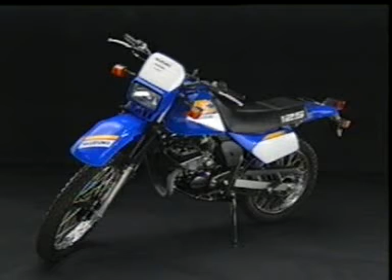The main component of a motorcycle is its engine. The first section of this video presentation will deal with engine types and their composition.

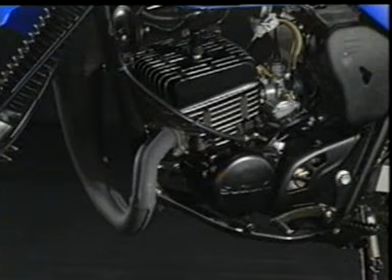But before discussing the actual makeup of each type of engine, let's go over the basic principle of operation of the internal combustion engine.

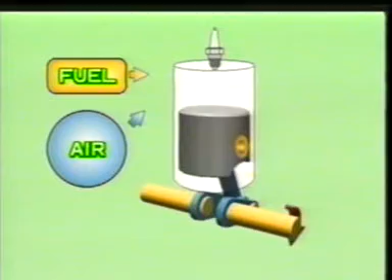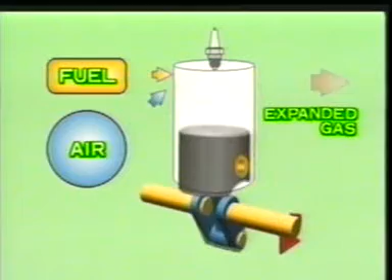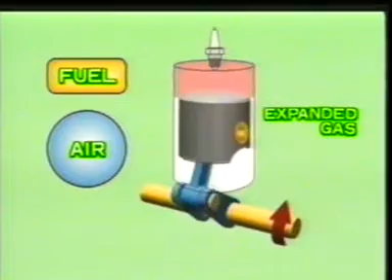A mixture of fuel and air is injected into the chamber of the cylinder above the piston and is compressed as the piston moves upwards. This makes the mixture very easy to burn. When it is ignited, it burns instantly and expands, increasing the pressure within the cylinder. The piston is then forced downward by the expanding gases created by the combustion. The force created by the downward motion of the piston is converted to a revolving movement by the crankshaft. The engine is thus a device which provides power from this revolving shaft.

As you can see, the engine operates in cycles. Each cycle is composed of the compression of the fuel-air mixture after intake, and the conversion of the force produced by gas expansion upon combustion. Each cycle is divided into 4 stages: intake, compression, expansion, and exhaust.

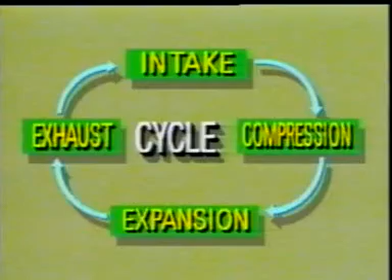Engines are designed in order to complete the different stages of each cycle without interruption. Many measures are taken so that the intake and exhaust will be executed smoothly.

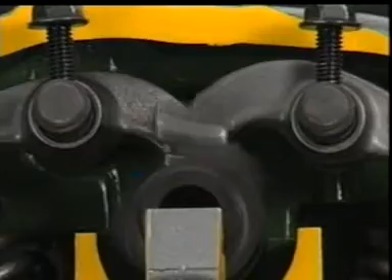The motorcycle engine can be designed in 2 different ways, both of which complete the same cycle. There is the 2-stroke method and the 4-stroke method. First, let's begin by looking at the 2-stroke engine, its composition and its systems.

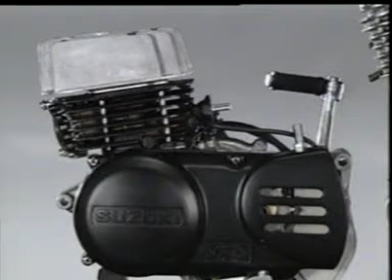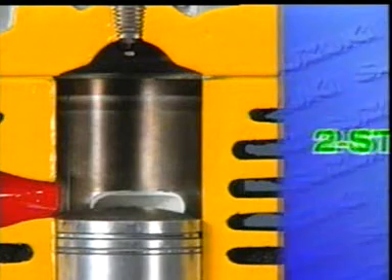During each cycle of piston movement, there is a time when the piston reaches its highest point in the cylinder. This is referred to as top dead center, or TDC. When it reaches its lowest position in the cylinder, it is said to be at bottom dead center, or BDC.

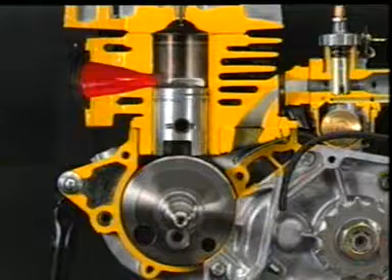The 2-stroke engine achieves 1 cycle with only 2 strokes of the piston. That is, there is only 1 revolution of the crankshaft.

As you can see here, there are holes in the cylinder and crankcase chamber of the 2-stroke engine. These holes are called ports and are designed to allow intake, scavenging, and exhaust.

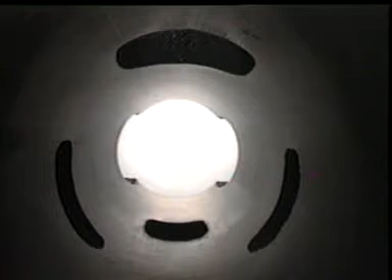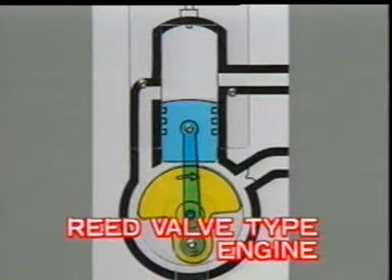Now, let's use this model of a reed valve engine in order to illustrate the basics of the completion of 1 cycle for the 2-stroke engine. In the 2-stroke engine, the upper chamber of the piston and the lower chamber of the crankcase perform 2 separate functions. Their differences are important.

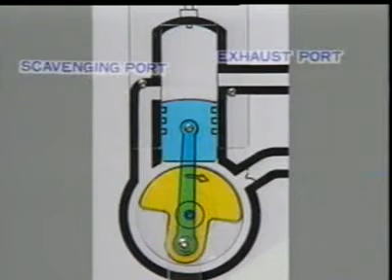First, as the piston passes BDC, it begins to rise. The scavenging and exhaust ports are closed in succession and the mixture in the cylinder is compressed. At the same time, because the vacuum in the crankcase chamber is increased as the piston rises, the reed valve opens in response, and the mixture is taken in to the crankcase chamber.

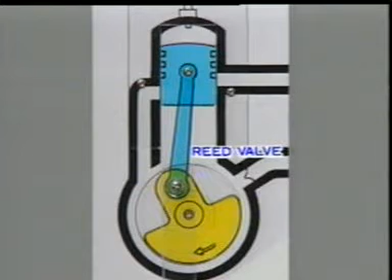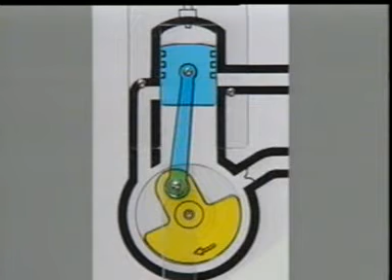The mixture that was compressed as the piston rose is ignited by the spark plug just before TDC and burns instantly, creating gases that expand. The expanding gases create pressure that push the piston down hard, creating the driving force of the engine.

As the piston descends, the vacuum in the crankcase chamber changes to pressure. The reed valve closes in response, and the crankcase chamber is sealed. As the piston falls further, the mixture in the crankcase chamber is compressed. This is referred to as primary compression and is a special characteristic of the 2-stroke engine.

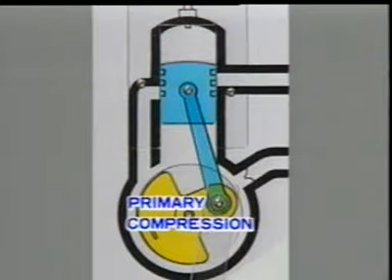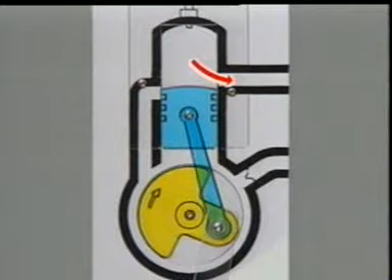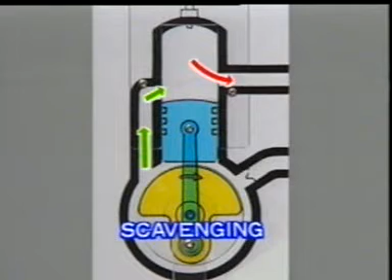As the piston descends further, the exhaust port is opened as the piston head passes it, and the exhaust gases from the combustion are let out of the chamber. A little later, the scavenging port opens and the compressed mixture from the crankcase chamber is injected into the cylinder, also pushing out the exhaust gases. This process of bringing the mixture from the crankcase chamber up to the cylinder chamber is referred to as scavenging.

In this way, the two-stroke engine completes one full cycle with 2 strokes of the piston, and power is obtained from every single revolution of the crankshaft.

Mixture from the primary compression in the crankcase chamber is injected into the cylinder through the scavenging port, pushing out the exhaust gases. In order to achieve this effect as efficiently as possible, the position and angle of the scavenging port must be determined with extreme precision, taking into consideration how the engine will be used.

The angles of revolution of the crankshaft, at which the intake, exhaust and scavenging ports are opened and closed, are expressed in the port timing diagram. Note the positions of intake, primary compression, scavenging, compression, combustion and exhaust.

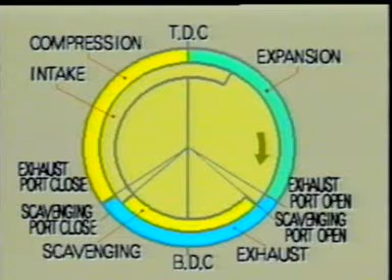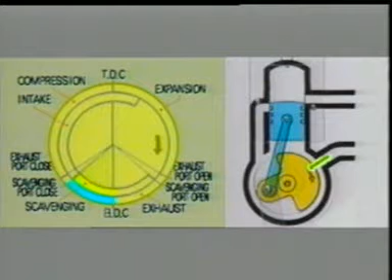As the piston moves on the upstroke, as soon as the scavenging port in the upper cylinder chamber is closed by the head of the piston, a vacuum is created in the crankcase chamber and this causes mixture to be taken in.

As the piston head rises further, it closes the exhaust port further up the wall of the cylinder and begins to compress the mixture in the cylinder. When the piston reaches TDC, the vacuum is no longer created in the crankcase chamber. The reed valve then closes and intake is completed.

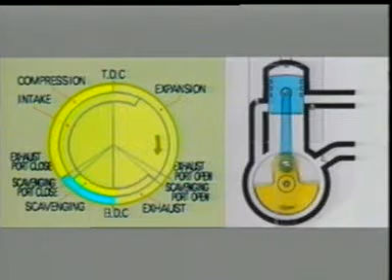Note that the reed valve intake system requires special intake timing. The opening and closing of the reed valve is determined by the speed of revolution of the engine and the inertia of the mixture taken in.

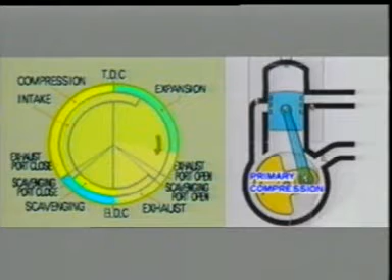When the piston is pushed down by combustion, the mixture in the crankcase chamber undergoes primary compression. As the piston descends further and the exhaust port in the upper chamber of the cylinder opens, exhaust gases are propelled through the port by virtue of their own expansion pressure.

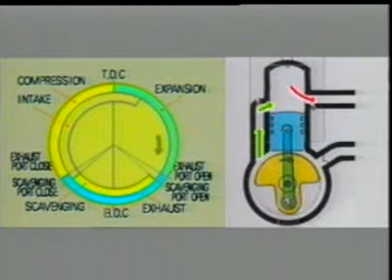Then, as the piston head passes the scavenging port, opening it, the mixture of the primary compression in the crankcase chamber is injected into the upper cylinder chamber by the scavenging effect. The operation of the two-stroke engine is the continuous repetition of this cycle.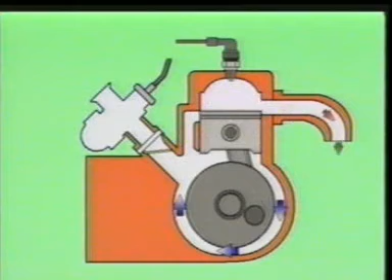The cycle of the two-stroke engine is completed in 2 strokes of the piston. The engine in which one cycle is completed in 4 strokes of the piston is referred to as the 4-stroke engine.

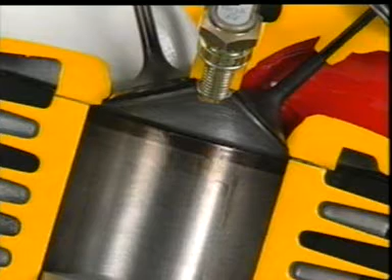The cylinder head of the 4-stroke engine has an inlet port and an outlet port. Each port is equipped with its own valve. These valves are operated by the camshaft, and they open and close the ports to effect intake and exhaust. This is the main characteristic of the 4-stroke engine.

Let's begin with the explanation of the intake stroke. When the piston descends from TDC towards BDC, the inlet valve is opened and the exhaust valve remains closed. The descent of the piston lowers the pressure in the cylinder and the fuel-air mixture is taken into the cylinder.

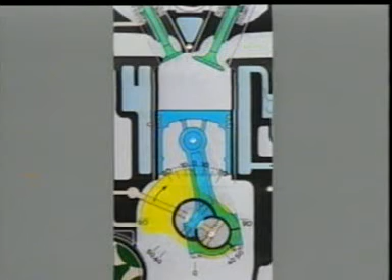Next is the compression stroke. The inlet valve is closed after the piston passes BDC and the cylinder chamber is sealed. The piston then rises and compresses the mixture in the cylinder.

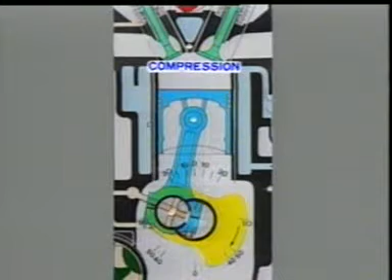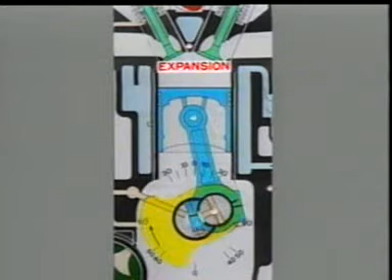During the combustion stroke, the compressed mixture is ignited by the spark plug. Combustion creates expanding gases and the piston is pushed down by their force. This is the source of the engine's power. During this time as well, both valves remain closed.

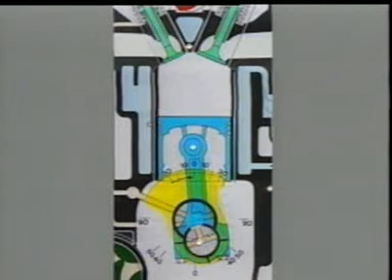The exhaust stroke is last. The piston reaches BDC and begins to rise again. This time the exhaust valve opens and the exhaust gases are let out.

The strokes, as seen in succession, are shown here. 4 strokes of the piston are required to complete one cycle, and drive power is provided once every 2 revolutions of the crankshaft.

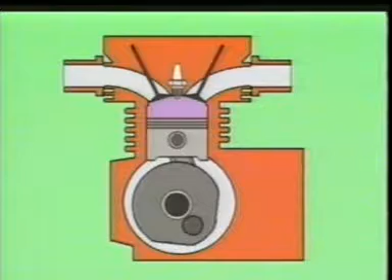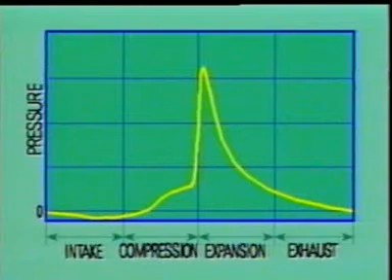The valves of the 4-stroke engine make sure that mixture intake and post-combustion gas exhaust are effected with precision. The timing of their opening and closing is referred to as valve timing.

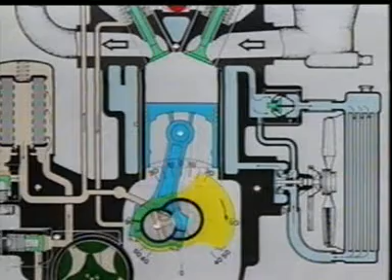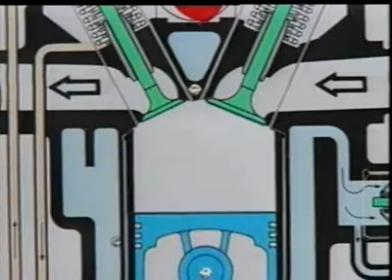If we take a closer look at an actual engine, we can see that valve timing is slightly different from the times when the piston reaches TDC and BDC. The valve timing is set in this way due to the inertia of the mixture and exhaust gases in order to improve engine efficiency.

The 4-stroke valve timing diagram shows at which angle of rotation of the crankshaft the valves are opened and closed. It is similar to the port timing diagram used in the 2-stroke engine and demonstrates when intake, compression, combustion and exhaust occur.

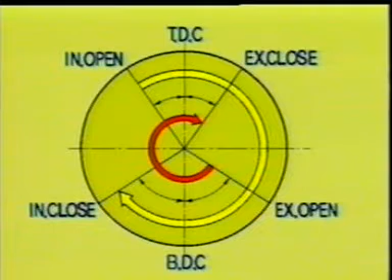The intake valve usually opens just before TDC. This allows for intake mixture inertia, making it possible to take in larger amounts of mixture. The intake valve closes after BDC for the same reason.

The valves remain closed for both the compression and combustion strokes.

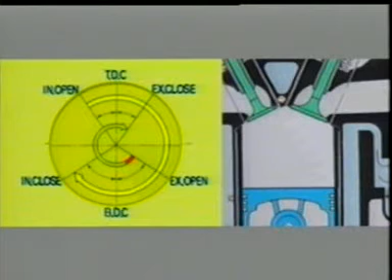The exhaust valve begins to open before BDC of the combustion stroke. It opens early in order to be sure that all the unneeded exhaust gases are expelled from the cylinder. The exhaust valve shuts after passing TDC of the exhaust stroke. This is done in order to utilize the inertia of the exhaust gases to clear them out of the cylinder.

The intake valve also opens around TDC of the exhaust stroke. Both valves being open at the same time is referred to as overlap. The mass of the mixture vapors let in at the end of the exhaust process aids in pushing out the exhaust gases still left in the cylinder. The early opening also allows more mixture to be taken into the cylinder.

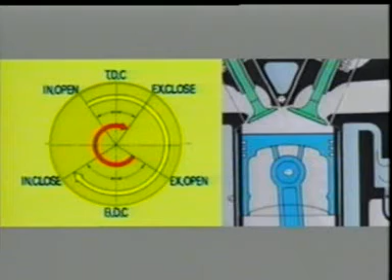The camshaft is responsible for opening and closing the intake and exhaust valves. In order to assure the proper timing between the operation of the valves and the piston movements, it is necessary to adjust the timing of the crankshaft and the camshaft.

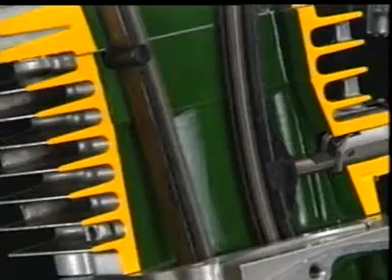The camshaft and crankshaft are connected by a chain that runs around sprockets on both shafts. The connection is designed so that the camshaft turns once for every 2 turns of the crankshaft.

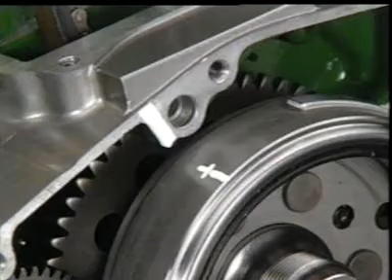Whenever a 4-stroke engine is taken apart and reassembled, it is necessary to adjust the timing of the camshaft and crankshaft. That is to say, the valve timing.

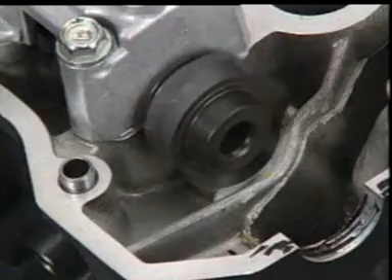The operation of the valves differs according to the type of 4-stroke engine. Some engines utilize a rocker arm between the cam and the valve tappet, and others have the tappets rest directly on the valves themselves. In both cases, there is always a gap between the valve and the rocker arm, or cam and tappet. If there were no gap, the valves would not close completely during the compression and combustion strokes.

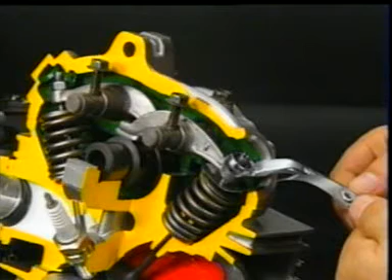There would be leakage of fuel-air mixture, and the power output of the engine would be reduced. This gap is referred to as the valve clearance. It is important to adjust it precisely.

In this video, we have looked so far only at single-cylinder engines in order to illustrate the basic operation of the motorcycle engine as simply as possible.

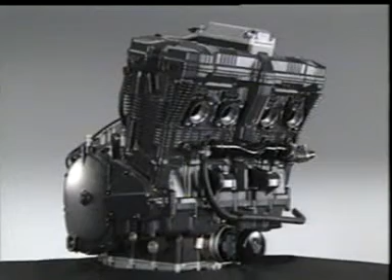However, Suzuki motorcycles are not all designed with single-cylinder engines alone. There are also many models with multi-cylinder engines equipped with 2 or 4 cylinders. When engines with larger exhaust capacity and larger power output are designed, instead of increasing the capacity of a single cylinder, increasing the number of cylinders results in better performance, less vibration, and a more comfortable ride. However, this also increases the number of parts, making maintenance more complex.

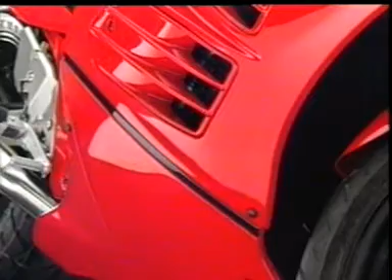Whether the multi-cylinder engine is being designed for 2 or 4 cycle types, ignition timing and the balance of inertia forces between the pistons and the crankshaft are factors carefully considered for high performance and a comfortable ride. Let's use an actual 4-stroke, 4-cylinder engine to see how the balance is achieved.

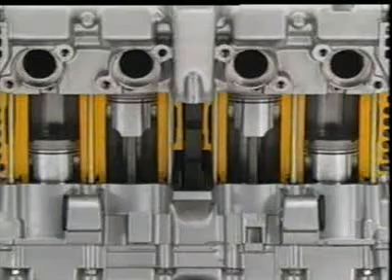This is a Suzuki 4-cylinder engine that has been cut open. The cylinders are numbered from right to left in order: cylinder 1, 2, 3, and 4.

As you can see, when we turn the engine, cylinders 1 and 4 on the extreme right and left move up and down in the same position, as do cylinders 2 and 3 on the inside. Although their up and down movements are paired, each cylinder is actually in a different stage of its cycle.

Engine movement is designed in this way so as to offset the inertia of the reciprocating parts. It also results in a balanced succession of ignition timing for each different cylinder, which improves the balance of the engine and reduces vibration.

The ignition timing is thus set at every 180-degree turn of the crankshaft in 4-cylinder engines. This creates an overall balance between the inertia forces of the pistons and the centrifugal force of the crankshaft, and by making the firing order of cylinders 1, 2, 4, 3, the vibration of the engine is greatly reduced.

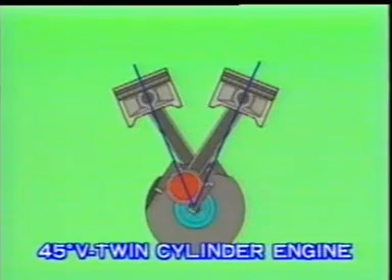In a 2-cylinder engine, where the cylinders have been placed at a 45-degree angle to each other, the engine's internal forces are balanced through the weighting of the crankshaft and the timing of the ignition for each cylinder.

In other engine designs, such as the parallel twin or the single cylinder, a counterbalance shaft is used not only to balance the movement of the reciprocating parts, but also to counteract the horizontal inertia forces as well.

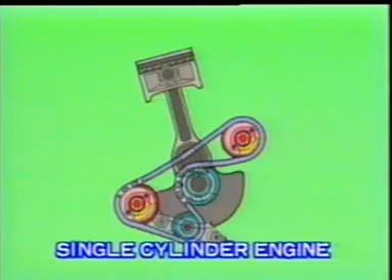If the engine is designed to take all these factors into consideration, it will run smoothly.

This ends our explanation of the basic operating principles of the 2-stroke and 4-stroke engine.